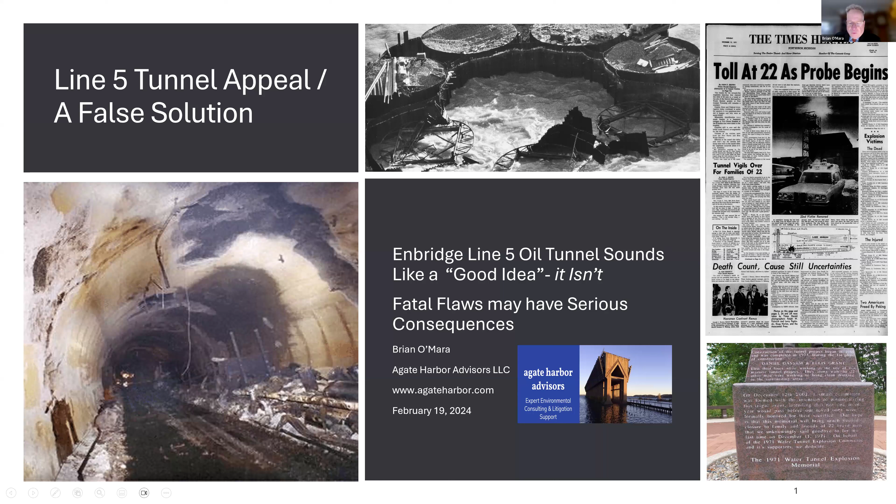So I just wanted to start the presentation off with this acknowledgement that things could go horribly bad, and this is what I'm trying to avoid. I'm not anti-tunnel. I spent the last 5 decades working on tunnel projects around the United States. Here's just a brief summary of my qualifications. I'm not going to go through them all, but as Denise mentioned, I did serve as an expert witness in the MPSC matter regarding Line 5.

I was specifically asked to review a couple of questions that came before the commission. Will the tunnel survive, or is it vulnerable to damage from a catastrophic failure from explosion or fire? The answer is yes, it is very vulnerable. It doesn't take much of a fire to cause concrete to fail, and the concrete on this tunnel has reinforcing steel, and that will melt, and the total integrity of the tunnel can be compromised and can virtually fail within minutes, depending on the strength of the fire. And that is certainly something that could happen in this Enbridge Line 5 tunnel.

The other question I was asked to testify on was, will the sediments and the rocks surrounding the tunnel serve as a secondary containment to keep the oil and gas liquids from migrating into the straits? The answer to that question was also no. The Enbridge tunnel will be operating at over 500 psi pressure. The overburden pressure of the tunnel, and that's basically the weight of the rocks and the sediment and the water above the tunnel, is only about 250 psi at maximum.

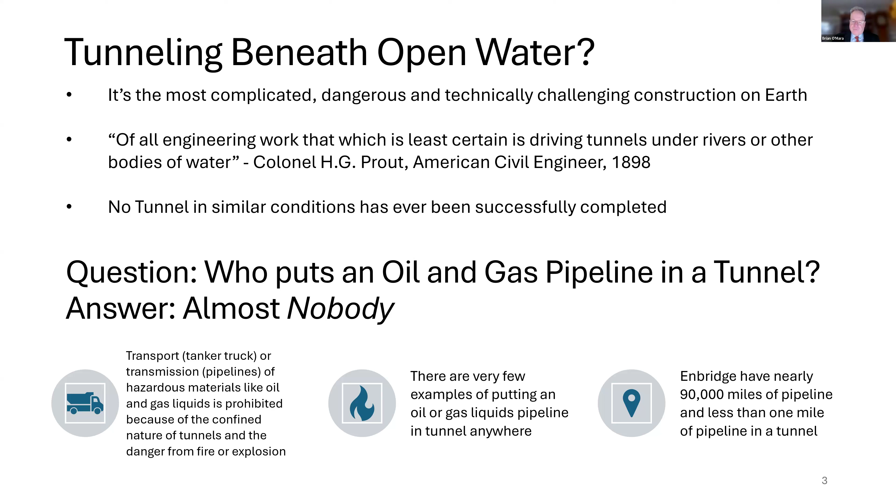My biggest concern about this whole project lies in the fact that the state of Michigan commissioned a study back in 2017 looking at the various alternatives for Line 5. And the alternative that was recommended was to place a tunnel under the straits and put a pipeline in the tunnel. But that alternative recommendation was qualified with several conditions that had to be met, or should have been met, I should say. The first one was that adequate pre-design studies would have to be completed prior to construction. Well, that hasn't been done.

The second was that the tunnel would be constructed completely within competent bedrock, which means solid rock that is not heavily fractured. There was also not to be any toxic gases or flammable gases, and that's what methane is, and Enbridge found methane. They said there couldn't be extraordinary groundwater infiltration or pressures. These were expected to be minimal. Well, they found just the opposite. They expect high groundwater infiltration with extremely high pressures.

And the last thing was that the tunnel annulus, which is the interior space of the tunnel between the pipeline and the walls of the tunnel, basically all this air here, that would be backfilled with grout or concrete to essentially make the tunnel solid, and that would prevent it from being vulnerable to fires, flood, freezing, terrorist attacks. All the threats that I've been raising that could happen in the Enbridge design would be largely eliminated if they just followed that.

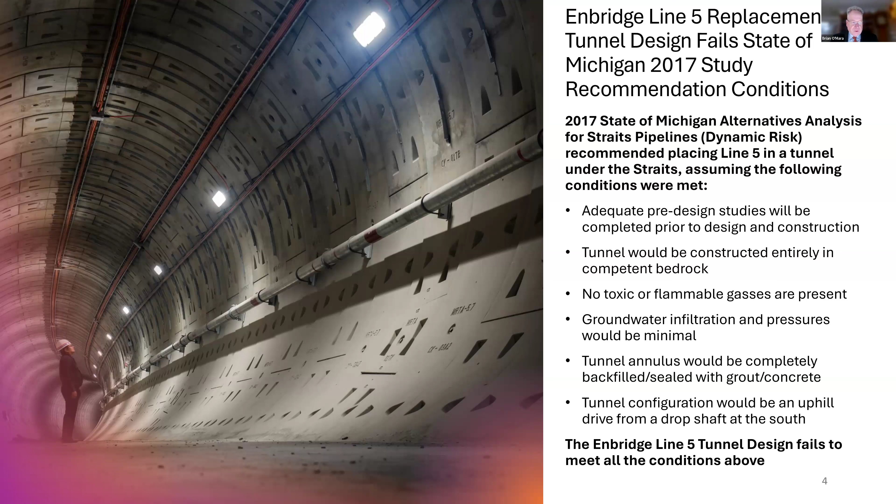The last element was driving the tunnel uphill rather than the Enbridge design, which is essentially a deep V. That's dangerous for the workers because they could be trapped on the downhill drive, or if they're on the uphill leg, as they're going north, they could be trapped and cut off with no way to be rescued. So it's just a bad design, from someone who's worked in these tunnels for hundreds of hours. That's the last thing you want to be doing, is trapped in a tunnel where there's no exit.

All right. We touched on a lot of these in the last slide. So we talked about all the ways that the current design doesn't meet the conditions that were laid out in the state of Michigan recommendation. I don't know how EGLE and the Corps of Engineers and the MPSC and the PHMSA and the Michigan Straits Corridor Authority, everyone seems to have overlooked this very important issue, is that what Enbridge is proposing doesn't come close to complying with what was recommended in that report.

Everybody's sort of forgotten about that, maybe because it happened in 2017, but these are real issues and they have to be addressed. And if they're not, I'm afraid you're going to be in a situation where you could have a catastrophic failure.

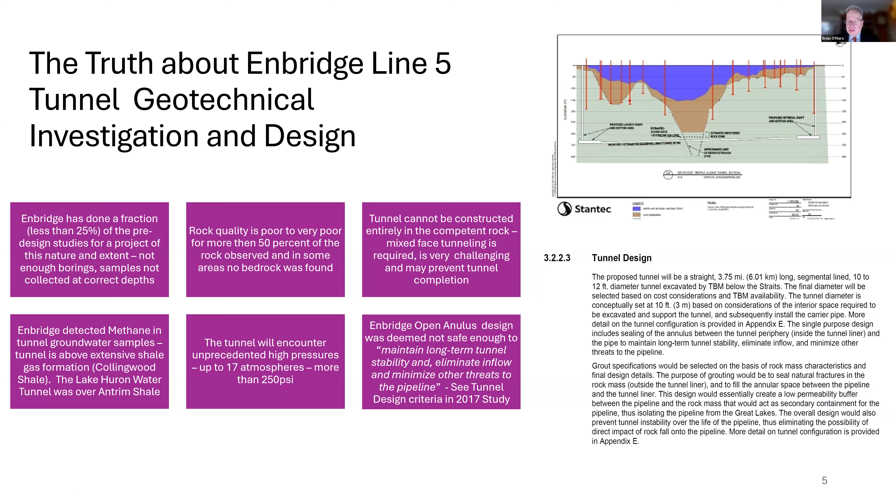We talked a little bit about this also. It's an unprecedented engineering challenge. This hasn't been done before. I don't trust Enbridge to get it right. It's going to be a challenge for anyone. And I have concerns about the contractor that's been selected. I have concerns about the limited design that's been done, the pre-design studies.

We talked about the open annulus of the tunnel, which exposes the pipeline to all of these various threats. The dissolved methane, which Enbridge found in their own studies, is in the groundwater beneath the straits. That groundwater will continue to seep into the tunnel as long as the tunnel's there. And when the groundwater seeps in, if the dissolved methane is in it, the methane comes into the atmosphere of the tunnel, and that can create an explosive condition, which could trigger a fire and/or an explosion, which could destroy the pipeline, destroy the tunnel.

Another concern I have is if they can actually get the tunnel constructed, they have to basically push the pipeline down through the tunnel and up the other end almost 4 miles. That's going to put tremendous stress on the steel pipeline and every one of the fittings and the joints. And that could cause a failure sometime in the future as the pipeline is operated.

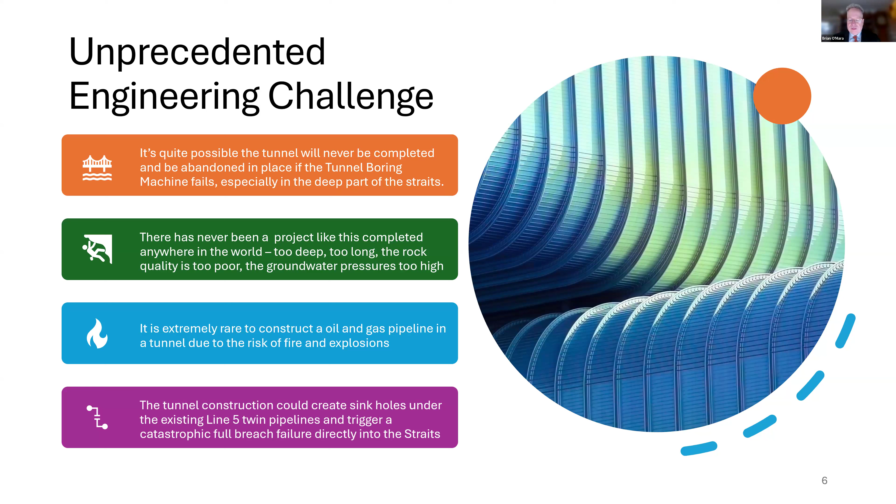And if there's no fire suppression system in the tunnel, that fire will heat the concrete to create the failure that I've been talking about, where the structure will come down, the pipeline will be destroyed, and it'll still be under high pressure, and the contents of the pipeline will make their way through the liner out into the rock and soil and ultimately the water column of the straits.

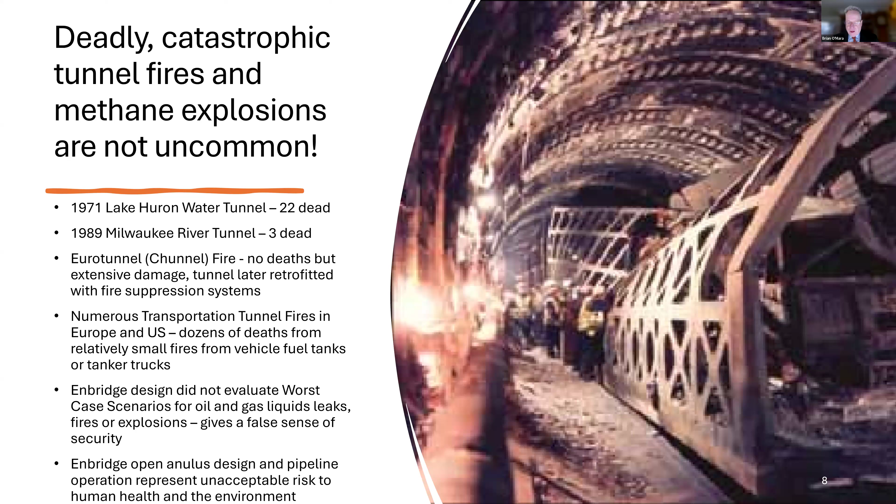This was a while ago. Nobody died in this fire, but there was extreme damage, as you can see. And the big change that came about after this fire was they decided to put an automated fire suppression system in throughout the tunnel. That's a good idea, and that's one that Enbridge has not incorporated into their design. We talked about the fact that the open annulus leaves the pipeline exposed to all the threats of fire and freezing and explosion, and that's the biggest fatal flaw with the proposed design.

Here's the last slide, essentially capturing the main points of my concerns. The design does not come close to meeting the conditions that were specified in the 2017 alternatives analysis. In fact, every one of the conditional assumptions and criteria were not met, and essentially this proposed design is not safe for the workers. It's not fit for purpose. It is asking for trouble by not addressing the concerns that have been identified by Enbridge in their pre-design studies.

The tunnel workers face death or injury from floods, fires, explosions and collapse, both during construction and after the tunnel is completed, if it can be completed, during the pipeline operations. They want to keep that tunnel open. There'll be workers going in and out of there. And that's, again, a recipe for disaster.

The main concern I have is a catastrophic release of oil and gas from the tunnel into the environment. And that's the reason they wanted to put the pipeline in the tunnel. But because of the way they're proposing to do it, they could actually end up with an even bigger problem than the current existing pipelines, believe it or not.

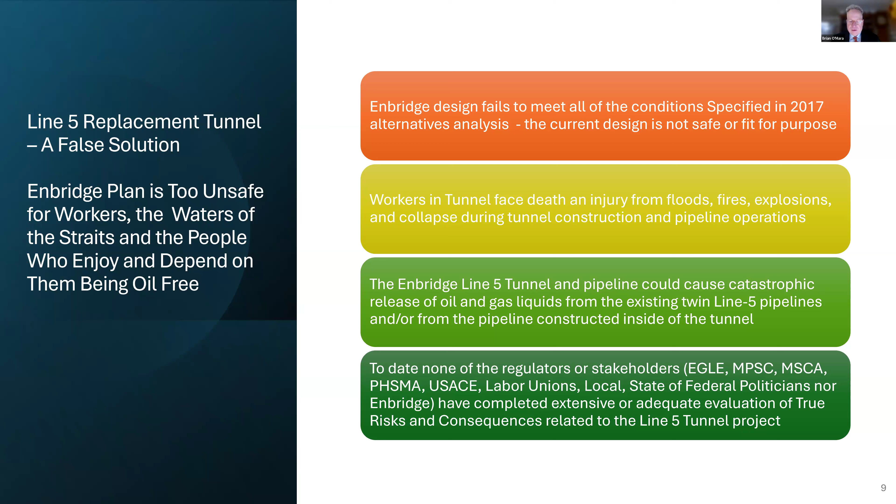I warned you, scarier than me. I'm sorry to be such a downer, but this is real. I've seen it, and early on in my career in Milwaukee, over 30 years ago, we had a tunnel where 3 people were killed, and it scared me straight, and I've been taking it seriously ever since. And I just can see that this could happen again, and I want to do everything I can to prevent it. So we so appreciate you coming out tonight.

I know we call on you to make these remarks so often, and I'll share one of the pieces when we were in court over the Michigan Public Service Commission's piece just about a month ago now. One of the pieces that the Enbridge lawyers kept insisting was, but everyone agrees that the tunnel is safer than the existing dual pipelines. And I heard the entire courtroom go, right, because we know that that's not true. And again, we're here tonight so that you could share that kind of evidence with the advocacy community that will take it and do what it can with those pieces.

Well, I just want to point out one thing. That assumption and conclusion by Enbridge is an example of circular logic, because they're going back to the 2017 report that reached a similar conclusion. But that conclusion was based on the tunnel being filled with concrete, okay? It's hard to have an explosion in a tunnel if it's filled with concrete, because there's no air for the explosion. And Enbridge, they don't recognize it. The regulators don't recognize it. And why they haven't incorporated it into design, it will add millions of dollars to the cost. I suspect that's why it is, but that's a key provision that is lost on just about everybody who's looked at this. So. Yeah, well, thank you again so much.